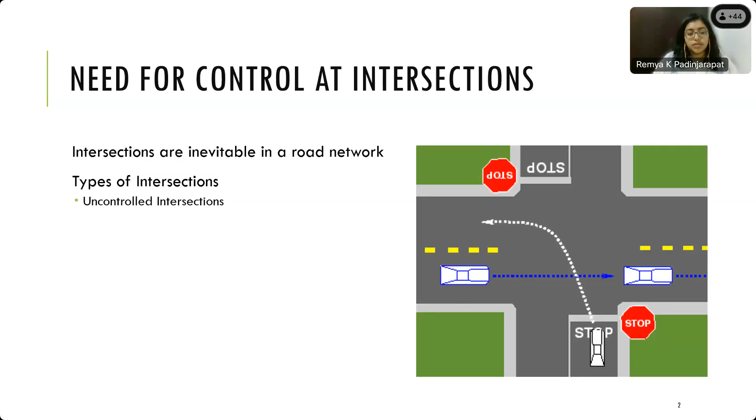I'll start with the basics. First, intersections are an inevitable part of a road network. There are various types: uncontrolled intersections, channelized intersections, rotaries, signalized intersections, and grade separated. Among them, signalized intersection is most popular in cities with a lot of city traffic and pedestrian traffic involved, because it works on the principle of time sharing, where different movements of traffic share the same space at different sections of time. So it's a highly efficient system for city traffic.

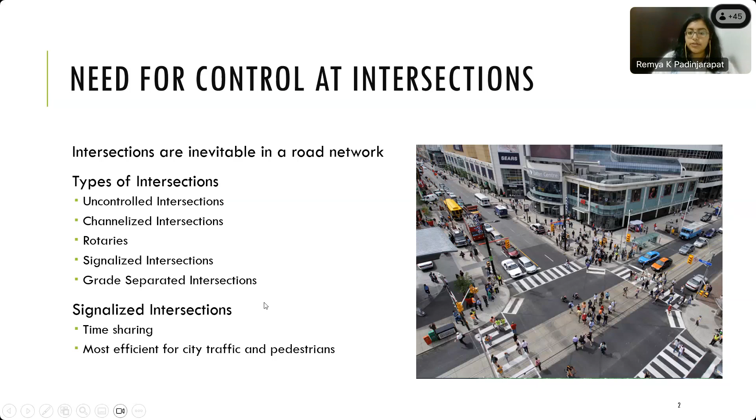Considering traffic types, there are homogeneous as well as multi-class streams. Homogeneous means vehicles have similar types and behavior, and they'll be lane following. But in multi-class traffic streams, there are a lot more varieties of vehicles, because of which the behavior is different, resulting in weak lane discipline. These characteristics become very strong specifically during queuing and queue discharge conditions, which is of much importance when designing signalized intersections.

Coming to the basics, in an ideal condition, vehicles will align themselves in a very orderly manner, and during the green time, the discharge is seen such that there is a lag. Excuse me, I'll just change my pointer.

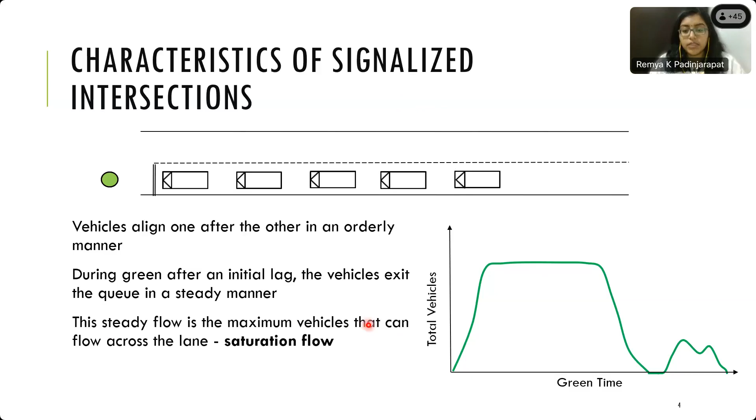Yes, so there will be a lag in the initial discharge, and once a point is reached where the vehicles will have a steady flow, this is the maximum flow seen at the intersection, and it is called the saturation flow, which is of importance for us at this moment.

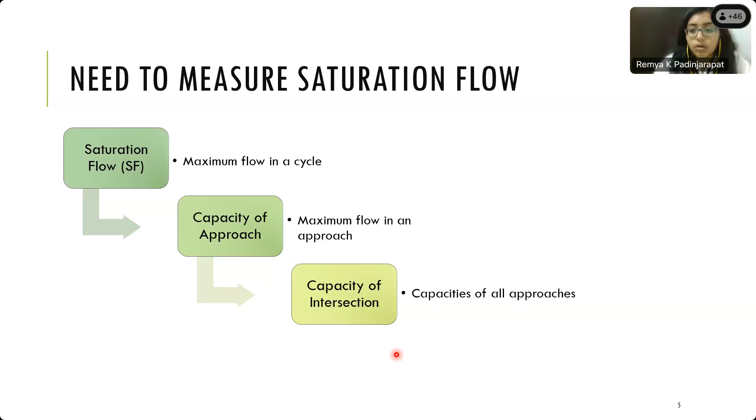So why do we need to measure saturation flow? It is the maximum flow in a cycle, which eventually translates to finding the maximum flow that an approach can take in, and it is used to find the capacity of an intersection, which is the maximum flow among all approaches, and redistributed to find the signal timings, proportionately divided based on the capacity of each approach.

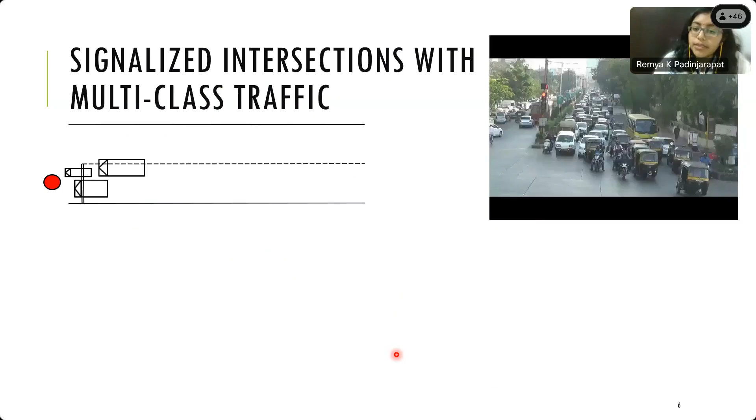But when it comes to multi-class traffic streams, this is a vague representation of how queuing would generally take place, because vehicles tend to take up whatever gap is available and move ahead in the queue. So we observe a diamond-shaped queuing pattern, and the vehicles tend to creep forward, which is known as headway compression. Even though the queue might be standing, the vehicles slowly move ahead, a phenomenon called headway compression.

And then there is the infiltration by smaller vehicles towards the front of the queue. The smaller vehicles just clog around in the front of the queue.

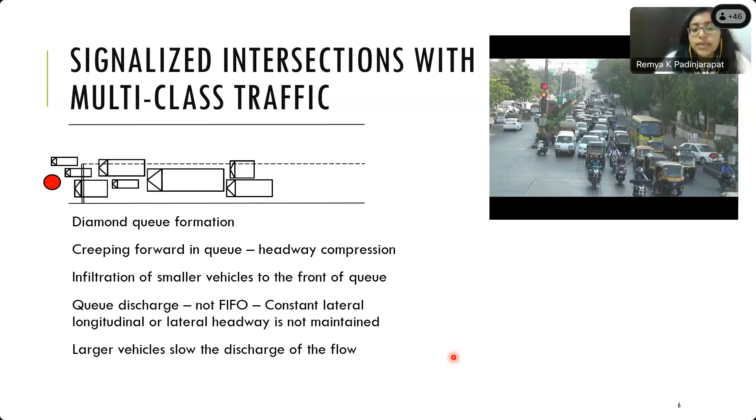What we see during discharge is that there is no particular first-in-first-out pattern. For example, you can see the two-wheelers here, they come from the extreme end and take their turns. Although they might not be the first vehicle in queue, they tend to leave the queue earlier. So in short, these behaviors show that larger vehicles will always slow down the discharge of the other flows behind them.

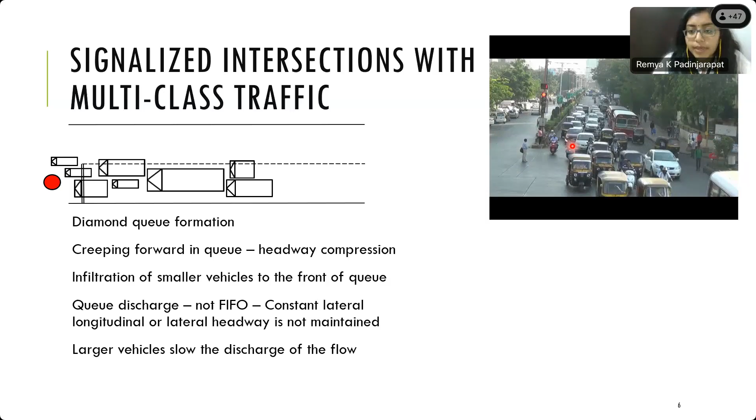Because of this, instead of a steady pattern, what we observe is a very fluctuating discharge. So this is one of the problems that we are trying to address in this study.

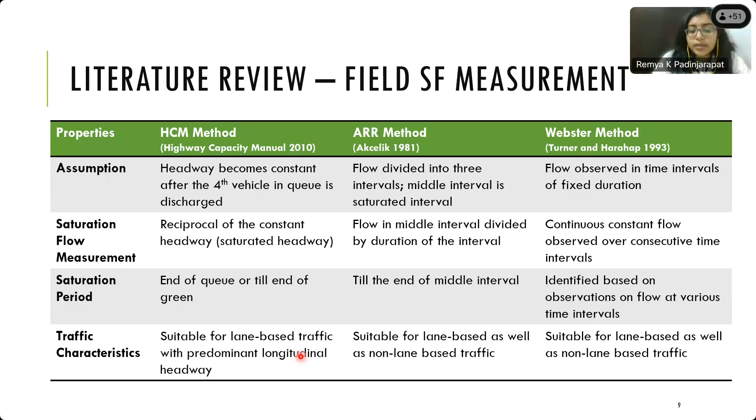So based on this literature, we can understand that Webster's method is better suited for measuring the flow data for saturation flow.

As far as saturation flow estimation models are concerned, which is in the absence of flow data or more into a planning perspective, the general pattern is that there will be a base saturation flow model, and there will be adjustment factors.

The base saturation flow model is usually the saturation flow seen in a base signalized intersection or base approach. So how do we define a base approach? It's something mostly described as without any disturbances from maybe side friction due to parking, there is a proper pedestrian crosswalk, there is no bus stop.

There are these many factors, and there is the presence of all car condition and no other vehicle type. So these are described as the base flow condition, and the adjustment factors will be the adjustment to each of the factors which deviate from the base condition.

So base saturation flow for the Highway Capacity Manual uses the saturation headway, and it's a constant value. For one lane, it is described as 1900 vehicles, and whatever changes from the base, of course there's a description of base intersection in the Highway Capacity Manual, and whatever deviates from that is used as an adjustment factor. And there are other manuals like...

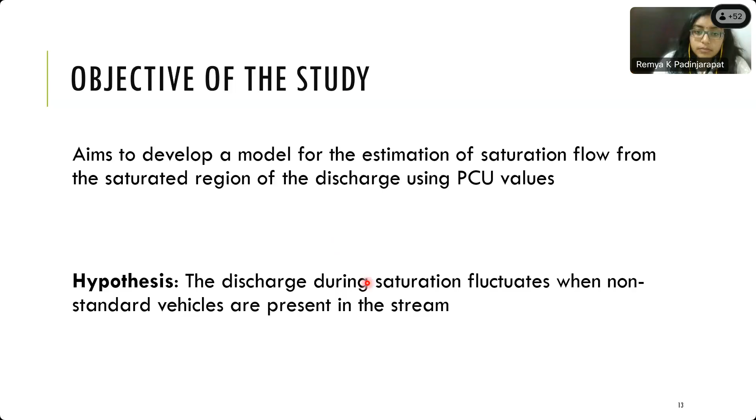It won't have the fluctuations that we see in the data. So based on this hypothesis, the fundamentals of the model is developed.

Suppose on the x-axis we have the number of vehicles, and the y-axis is the green time. We can see that the flow is fluctuating throughout the green time. So an expected saturation flow shown in the red line would be such that the PCU values bring the flow of vehicles towards this saturated flow line.

So PCU should be able to describe the deviation of the flows from the expected saturation flow value. And this we can sum based on the equation that saturation flow will obviously be the sum product of PCUs as well as flow values in each of the intervals.

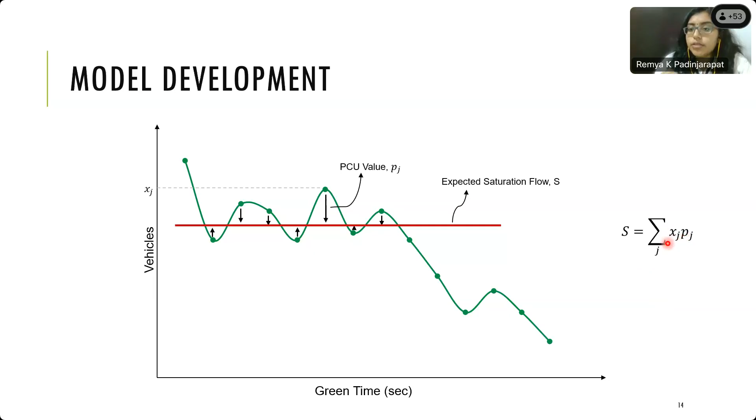So our model starts here. And if we have a regression form of the equation, it would look like this, where S is equal to sigma over J, xj pj, plus epsilon, where epsilon is the residual error term, x is the flow values for the particular vehicle class J, and P is the PCU values of the vehicle class.

So basically, the idea is to find out the PCU values which will best fit the flow values to describe a saturation flow. Now, rewriting this equation, if we have the error term on one side and the other terms on the other side, we can rearrange the equation as such.

And if we square this summation of this equation over various intervals. So far we have been talking about the PCU values for a single flow or cycle. Now what we see is we have multiple intervals over which we have the data. So basically the sum of all the intervals should also give the same saturation flow value.

In that term, we are summing the epsilon, the RHS and the LHS, and squaring them for better accuracy, so that we basically end up with the sum of squared errors.

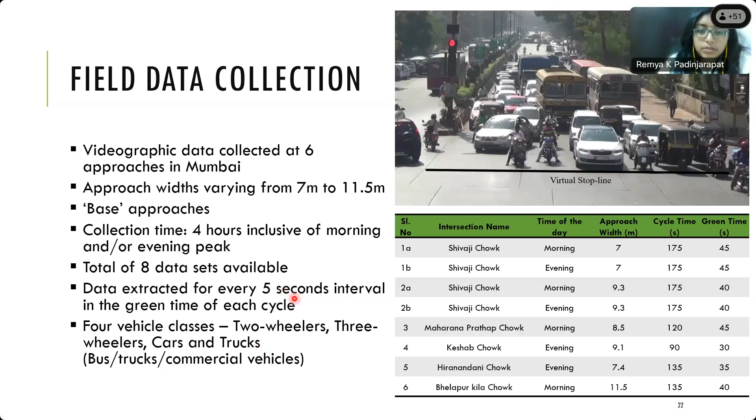We considered 4 vehicle classes: 2-wheelers, 3-wheelers, cars and trucks. Trucks includes the wider range of buses, trucks and commercial vehicles. So at the end we have classified flow data in each 5-second interval for each cycle along all these intersections. That was quite data intensive.

Coming to what the discharge profile would look like, we can see there is an initial peak. In the first 5-second interval, there is a peak in discharge, and this is possibly due to the infiltration of 2-wheelers and them accumulating in the front of the queue. After that there is a decrease, and this continues for some time till the whole queue dissipates.

So we come back to our question: how do we start, or where does the saturation flow start? What is the value, and how long does the saturated region last? The first interval shows the initial surge. We can see a surge in the initial discharge as opposed to a gradual increase, which is seen in ideal conditions.

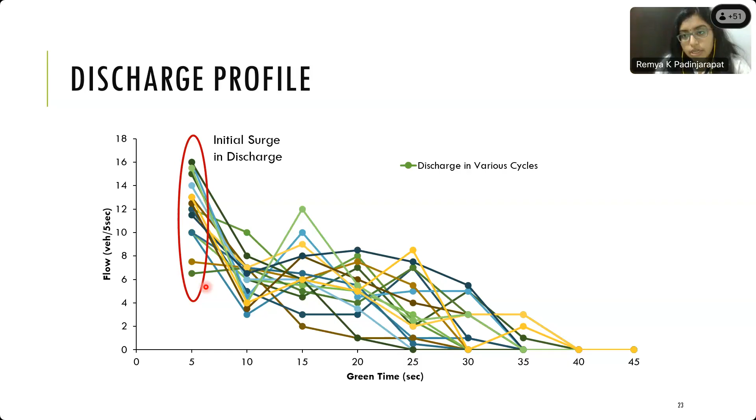Although there is a surge, this is not the steady flow present throughout the discharge, and hence this flow cannot be taken into account for estimation of saturation flow by definition itself. So we will not include this part, and we'll take forward from the 10-second interval onwards, assuming the 10-second interval to be saturated and starting from that point.

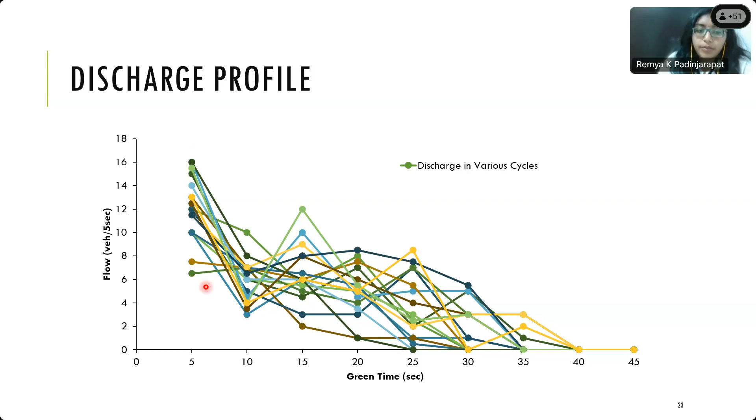So although this value is not taken into consideration for saturation flow estimation, it is quite important to be incorporated into the capacity, or as an adjustment factor, which is done in the Indo-HCM.

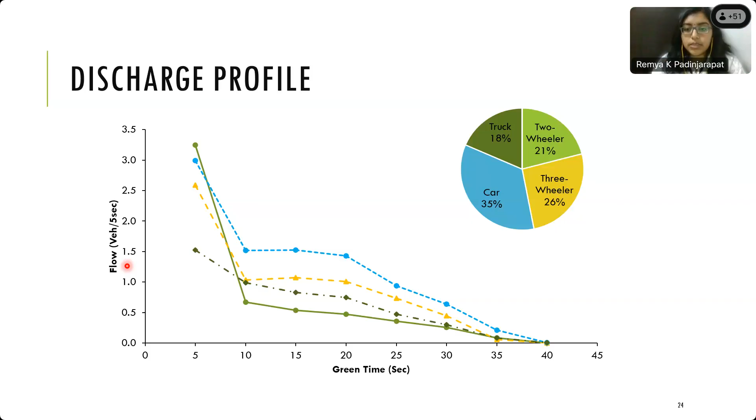As discussed, the saturation flow period needs to be ascertained, because the data we need for our model is the data from the saturated region. Although we have eliminated the first interval's data, we'll start with the second interval, and we will start by assuming that the data in the flow in the second interval is indeed saturated.

From there, every interval is statistically compared with the 10-second interval data, and however long the data is seen to be comparable, the saturated region is assumed to continue till that period.

I can show that with an example. Here there's a first interval we are not considering. The second interval is assumed to be saturated. This can also be seen in other literature, where the ARR method and Webster's method suggest an approximate 10 seconds after which the saturated region starts. So we are in line with other studies.

Now, which of these intervals is saturated and for how long it might go on? We take data from each interval and compare it using a t-test, in this case with an alpha of 0.05. The hypothesis is that the difference in means between the 10-second interval and the interval under consideration is 0. When the test is a success, we consider that region to be saturated.

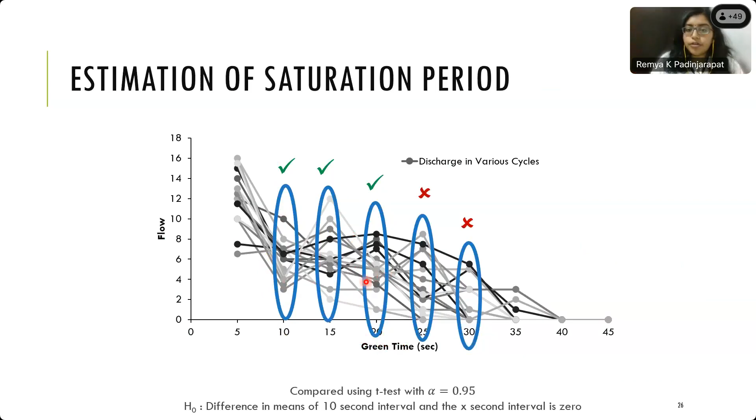So the data from these intervals alone will be taken in for the study. Now, the input into the optimization: so far we have got the data from the saturated period, which will be the input into the optimization model. We had the field data, every 5-second interval, and we statistically estimated the saturated region.

From there, we move on to the convergence test, where the determinant of the Hessian must be greater than 0. For each data set, we will find out what the Hessian is and ensure that it's greater than 0, so that we can use it for further analysis.

We had not given this condition into our optimization model, but the results are showing as such, which indicates that the logical consistency we expect, the logical arrangement of PCU values we expect from the data, is actually reflected in our results, indicating that our results are quite consistent and able to logically derive the correct values for PCU.

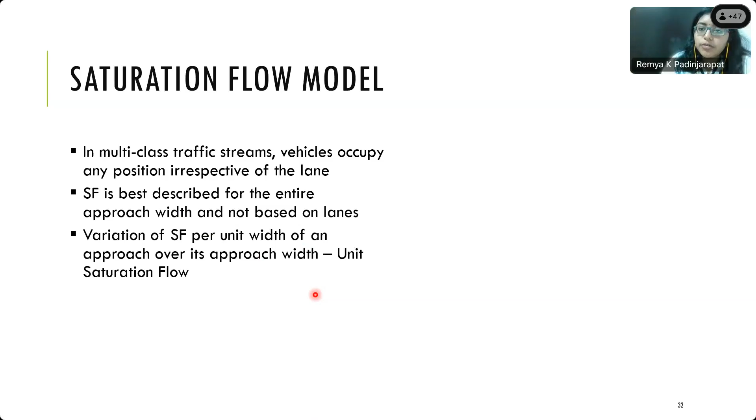What this unit saturation flow signifies is something we might have experienced while driving—that in approaches with smaller widths, vehicles are packed more densely than in approaches with larger widths. So the dense packing, or even during discharge, the aggressive behavior of discharge is higher for approaches with lower widths compared to higher widths.

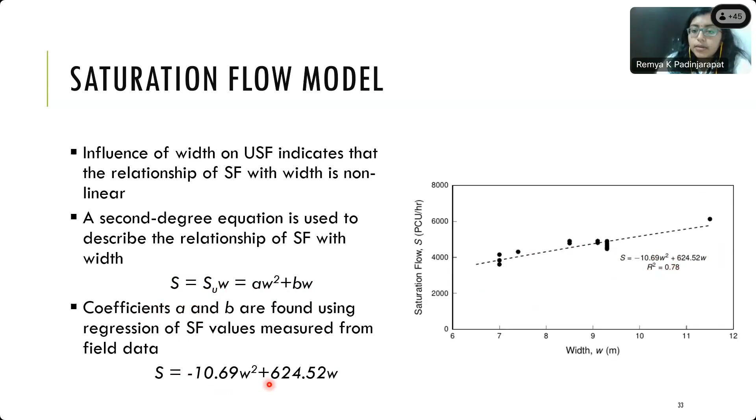So that element of non-lane-based traffic, or the discharge behavior, comes into picture using unit saturation flow. From unit saturation flow, we arrive at the equation for saturation flow, which equals unit saturation flow times the width. With A and B as calibration constants from our data, we develop a saturation flow model, shown here, which is a second-degree model indicating that saturation flow has a non-linear relationship with width.

Now coming to the inference from the study: the hypothesis that PCU can define the unevenness of flow is confirmed by this study, and the model we developed based on this hypothesis yields consistent results across all locations. We can see that it is efficiently able to capture the vehicular interaction.

The PCU values that result from the model are seen to have a logical consistency with the size and maneuverability of the vehicles that we see on the road. And PCU values are seen to depend overall on the stream composition rather than the individual composition.

Again, the unit saturation flow value is able to describe the discharging behavior in non-lane based multi-class traffic streams. So the study provides a novel saturation flow estimation model using field data, and the model is generic in the sense that it can accommodate more vehicle types. Although we have studied only four, we can have more vehicle types, or even reduce the number. Additionally, it can be used to measure saturation flow in different conditions. We have only studied base conditions here, but it is suitable for flow measurement in every other weather condition.

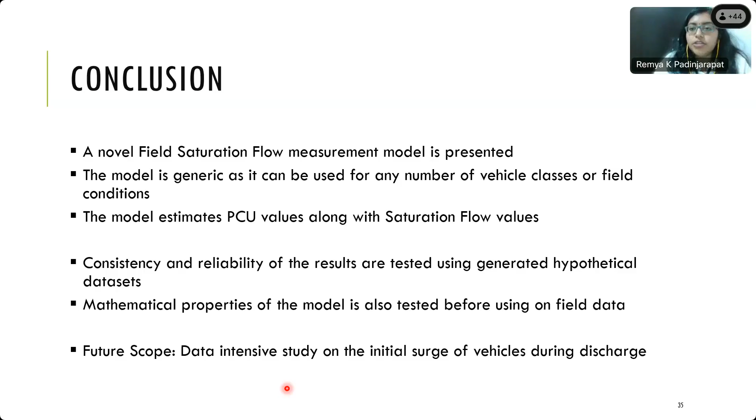As for future scope of the study, we can conclusively say that the initial surge of vehicles in discharge needs extensive study, and their effect on arrival rates and arrival patterns are a promising direction of research. We have a publication from the study, this is the online link, I can provide it if required. So I think we can open for discussion.

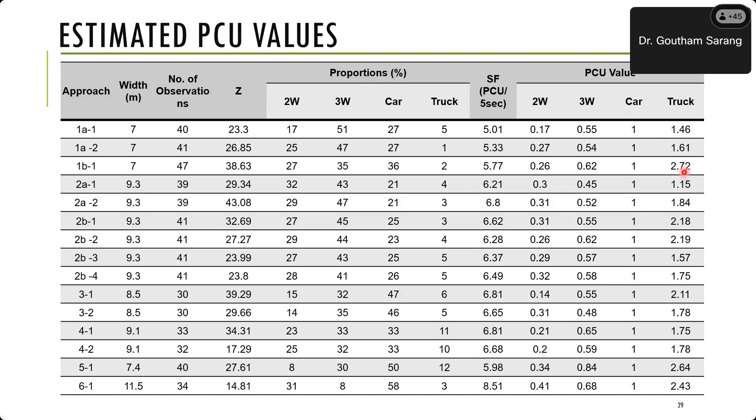Hello? Hello? I'm sorry, I'm not able to hear anything after three-wheelers. Praveen, hello, is my sound on? It's not coming from your side. Sorry. Yes, Praveen, I think you're okay now. Can you hear me now? Yeah, okay, so I actually lost it after three-wheelers.

So you were saying that three-wheelers do not show the same doubling difference. I was asking, for two-wheelers the variation was almost twice, and for trucks also the variation was almost twice, but that variation was not observed in the case of the three-wheeler. What could be the reason for that? Is there anything significant for that particular vehicle type?

Particular vehicle type, you're saying. Yeah. Okay, so rather than the effect, the main reason the variation of truck is too high is because we have considered multiple vehicle types, for instance LCV, buses, trucks, everything into one picture. That is one reason why truck might show double. Although when you say double, the number is quite significant when it comes to the value itself. For two-wheelers, the way we should look at it should be a little different than saying it's double the particular number. It would be more to see that the variation between the flow or the numbers is quite small. I think I would look at it in that perspective, indicating that we have better results from the PCU values or the model.

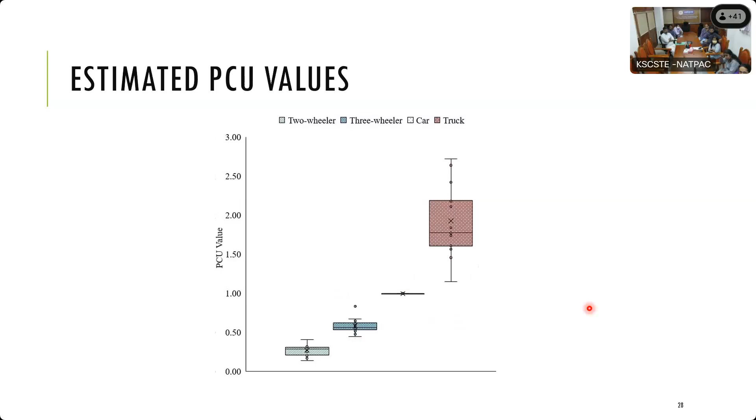Okay, but even then, the three-wheeler is the only thing which stands apart, right? Yeah, you can say that. Actually, I have not thought in that direction. We were mainly looking for the influence of one vehicle over the other, and based on the mean and standard deviation values, the value seems to be within the expected range or deviation.

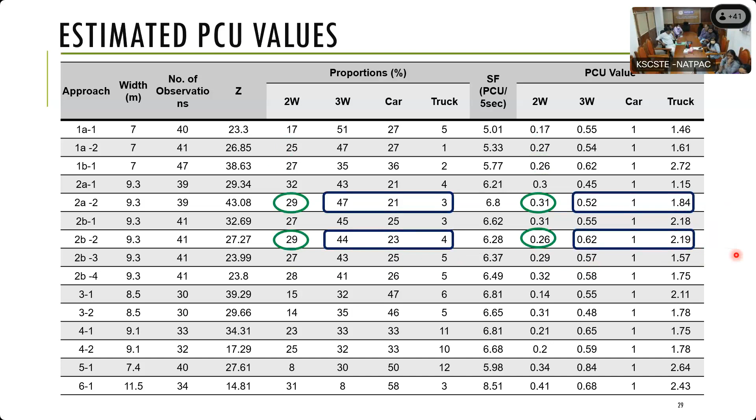Okay, just one more question. In the case of unit saturation flow, the saturation flow was computed per meter width, right? At any point of time, was the time factor, like per second, considered? Because in the case of aggressiveness, normally for higher width, the per second rate will be much higher, right?

When compared to the lower width roads, I could see in the inference part that aggressiveness was mentioned - in case of lower width roads, the driver seemed to be more aggressive than the higher width road. So I was skeptical, like if aggressive means the gaps might be lesser, they might drive closer to the vehicle ahead of them in case of smaller roads than in case of wider roads.

What we mean to say is reflecting the denseness, how many vehicles are occupied in 1 meter width of a road during discharge is different for a lower width road than a higher width road. So in roads with lower widths, more vehicles tend to be accommodated in 1 meter than with roads of higher width, where a little bit lesser number of vehicles will be there in 1 meter unit of the road. Yeah, that's obvious.

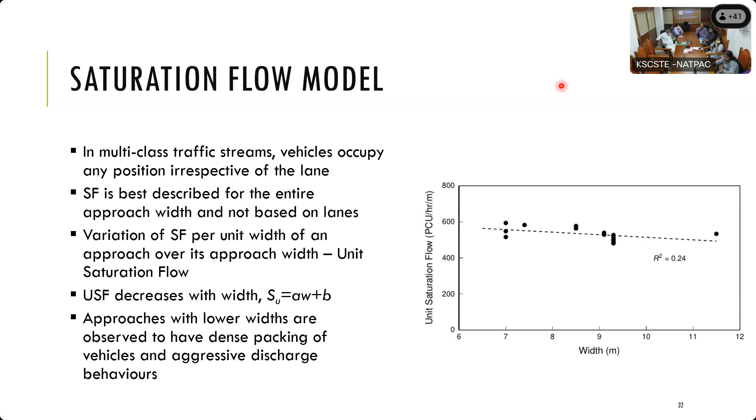Okay, so if you want to really know, we can see here the values in PCU per 5 seconds, and if we compare that across different widths... This is PCU per 5 seconds for each width. You can see here there is definitely a difference in the PCU values, and if we go by per meter, it will eventually even reduce.

Okay, fine, thank you. Ma'am, there's a question from Mithun: How are the estimated PCU values from this research different or similar to the outcomes of similar Indian research in this area? Also, was the effect of initial surge of traffic from the approaches considered in this analysis?

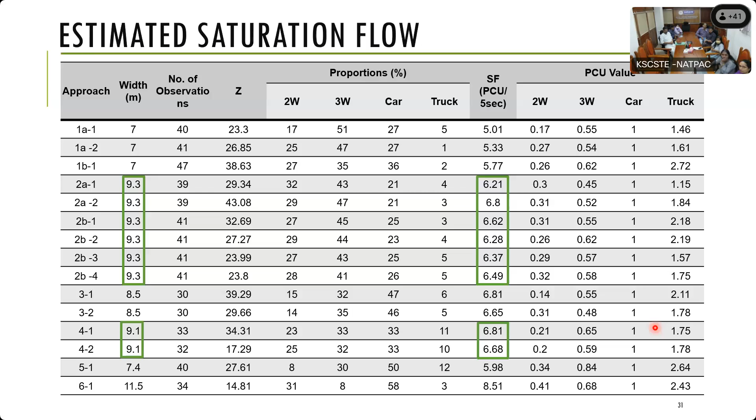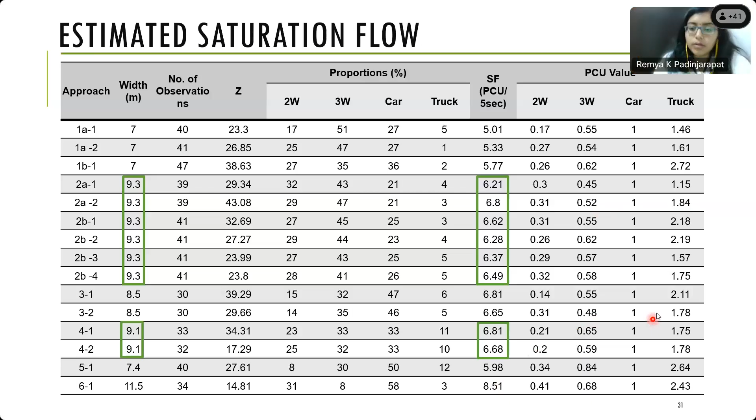Okay, I'll get the first question first. Can you please repeat that? It is there in the chat box. Okay, okay. You want us to again repeat? No, it's okay, I'll take a look. Different or similar to the outcomes of similar research seen in India - so how is it?

Considering research in other areas, we can see that the PCU values are aligned with the logical consistency and what is generally expected or seen in other research, because the PCU values of two-wheelers range within the usual range of 0.2 to 0.44, and again 0.4 to 0.67, and car is obviously 1, and that of trucks is also within the range. So what we observe is PCU values are consistent with the expected outcome and are also logically consistent, even though we had not explicitly input that as a constraint in the model.

Now coming to the effect of initial surge - yes, initial surge is not used here because we are focusing on the analysis of saturation flow during the saturated interval, and initial surge is not part of the saturated interval because it is a one-off condition, not considered as part of saturated interval. Saturated region by definition is the prolonged existence of a high flow or the maximum flow. So since initial surge is only the initial part, it does not prolong through the discharge, we cannot take it into estimation of saturation flow.